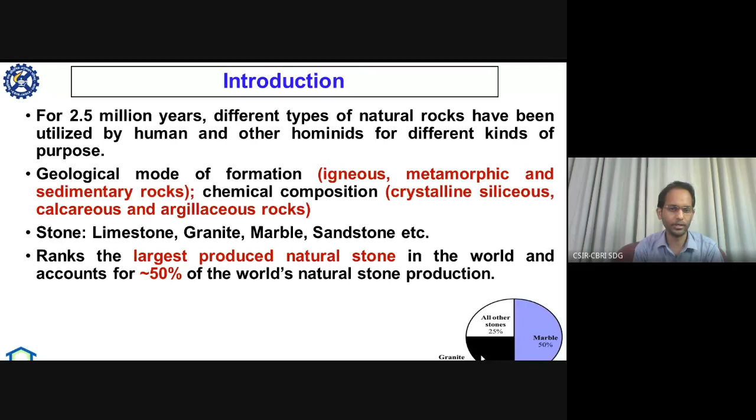On the basis of production, globally, India ranks as the largest producer of natural stone, accounting for nearly 50% of world's natural stone production.

Basically, as a brief introduction, limestone is a sedimentary rock which typically contains 70% by mass of calcium carbonate. Typically, in many forms of limestone, some amount of silica or magnesium carbonate is also there. If the incorporation of SiO2 is there, ranging from 30 to 40% or 45%, which will reduce the overall calcium carbonate content, that limestone is called low grade limestone.

The annual production of limestone in India is about 238 million tons, out of which 10 million tons is Kota stone. Basically, Kota stone is a kind of low grade limestone. I am emphasizing here about Kota stone because the research work I will discuss further will be about low grade limestone. This data is taken from Center for Development of Stone, CDOS, the report published in the year 2017.

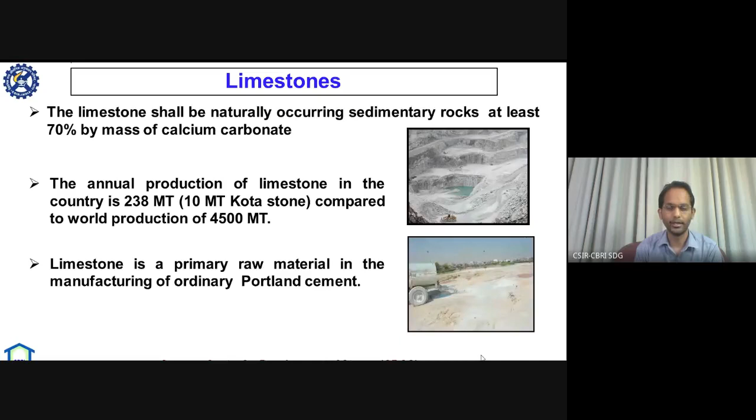Limestone, as we know, is primarily a raw material in the manufacturing of OPC. So it is widely extracted from quarries, mines, and therefore the generation of waste from limestone is higher than that of others.

Now here it is a kind of limestone, but it is low grade, as I have discussed in slide number 4. So the processing of limestone, either by chainsaw or diamond wire cutting or during polishing from quarries, generates a major amount of waste, that is 50% of the waste, which is annually about 4.5 million tons.

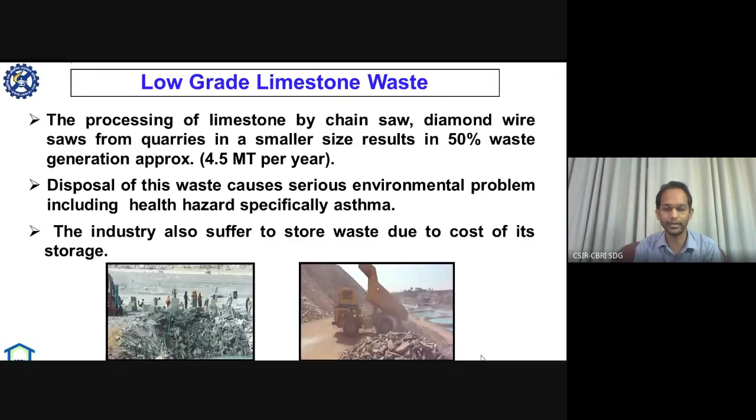Disposal of this waste causes various kinds of environmental pollution, like air pollution, water pollution, and land pollution. It also affects the longevity of people living near the areas where stone polishing slurries are dumped. The industry also suffers to store this kind of waste. You can see in both figures they just dump it in the open agricultural field, causing different kinds of environmental pollution.

In detail, the problems that occur are: the settled slurry is pumped out into adjacent agricultural lands, which devastates the fertility of that agricultural land by choking the overall porosity, and decreases the nutrition value of that agricultural land.

These microfine slurry particles, having D90 size of 200 microns and D50 size of 5 microns, choke the drains, as I have discussed, in the rainy season, create dust nuisance, and affect productivity of fertile land due to decreased porosity. Due to this long-term deposition, the finer particles block the flow regime, which affects the groundwater table, and thus overall underground water availability reduces.

As you can see here, these left two figures show the dumping sites of marble slurry in the Udaipur region, and in the right bottom you can see the RSPM level, that is respiratory suspended particulate matter, which we can inhale. I am not talking about the particles that we can't inhale, that is given in the rest of the two figures.

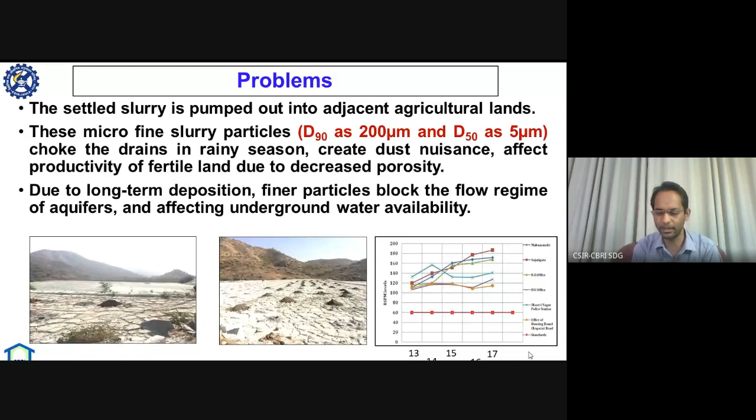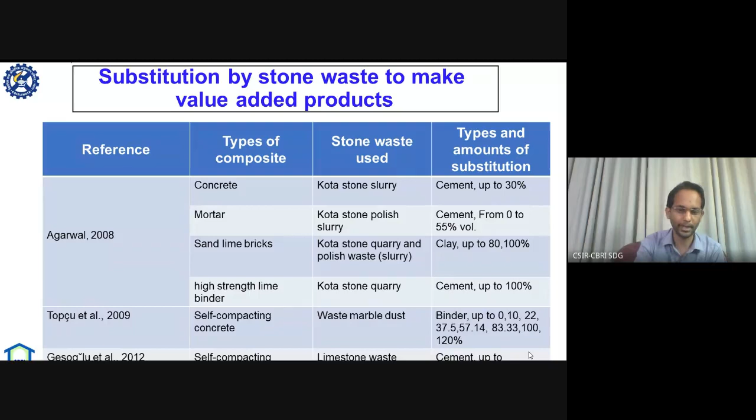Now I will discuss the work carried out by many researchers, such as Agarwal, Topçu, and Gesoğlu. These researchers have used Kota stone slurry, marble slurry, and limestone slurry, and substituted cement in fractions ranging from 0 to 100. Some replaced clay, some replaced cement, and they developed concrete, mortar, sand lime bricks. A binder was also developed, known as ALPM, activated lime pozzolana mix, developed at CBRI in the early 90s. Self-compacted concrete has also been developed, and so on and so forth.

Overall, if we replace the sand with stone slurry, any kind of stone slurry, whether marble, limestone, granite, or sandstone, it will increase the strength attributes, whether compressive or tensile. It will increase thermal resistance, abrasion resistance, shrinkage, and cracking resistance, etc.

But if we replace cement in a higher amount, more than say 20%, it will at the same time decrease the strength and thermal resistance. Heat of hydration will be decreased, and setting time will be reduced because it forms nucleation sites in the cement composite mix during hydration. Workability will also decrease due to its higher fineness.

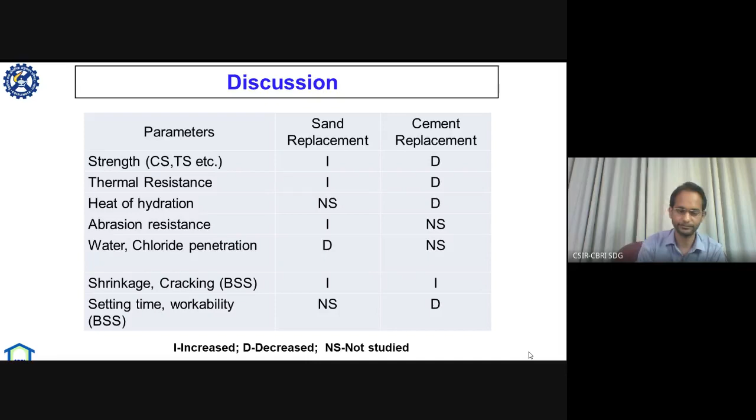So the need for research, why we developed lightweight concrete blocks from stone: India is the second largest producer of bricks in the world, with annual production of about 200 billion bricks, which uses 400 million tons of good quality soil every year. The number of brick producing units, whether vertical shaft kiln, high draft kiln, or any other kiln, is more than 1 lakh. The burning of fuel results in greenhouse gas emissions in the form of CO2, NOx, etc., and ashes generated from fuel cause various kinds of environmental pollution, including air pollution majorly.

So the replacement of stone powder waste as an aggregate, powder, or dust with cement or aggregate in conventional concrete has improved the properties of hardened concrete, as I have already discussed. Therefore, lightweight concrete as a replacement for brick is developed, as per IS 2185 Part 4, which is about lightweight concrete, which I will discuss further in brief. We have evaluated different attributes, physico-mechanical and chemical properties, in terms of workability, compressive strength, strength performance factor (the ratio of strength and density), fresh properties, drying shrinkage, and microstructural characterization, etc.

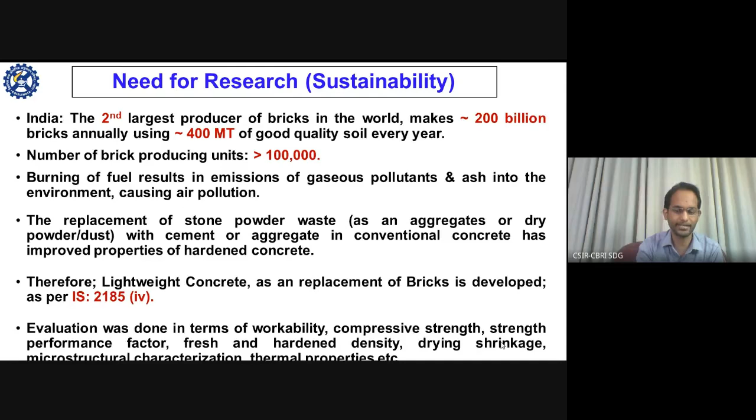For foam concrete, we use a foaming agent. The foaming agent can be organic or synthetic. Organic means natural protein, or soybean protein we can use. And the curing is just moist curing or ambient air curing. The industry mostly uses moist and air curing, not water curing. The reason I will discuss in the further slides.

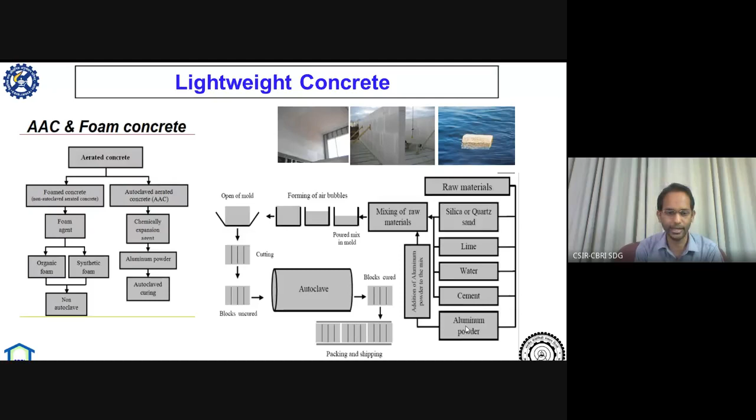So now my main emphasis in the further presentation will be cellular foamed concrete, CFC. I have used the mechanical aeration method, and the technique was preformed foam. That is, the foam was formed before the mixing process. It was not like after adding the whole material, after some time the formation of gas will be there. We developed the foam prior to mixing in the mixer.

And basically foamed concrete contains stable air or gas cells uniformly distributed in the mix. Note that it should be uniformly distributed, and it was as per IS 2185 Part 4, and it possesses high flowability, having flow value more than 150, low self weight, minimum use of fine aggregate, controlled low strength, and excellent thermal and sound insulation properties.

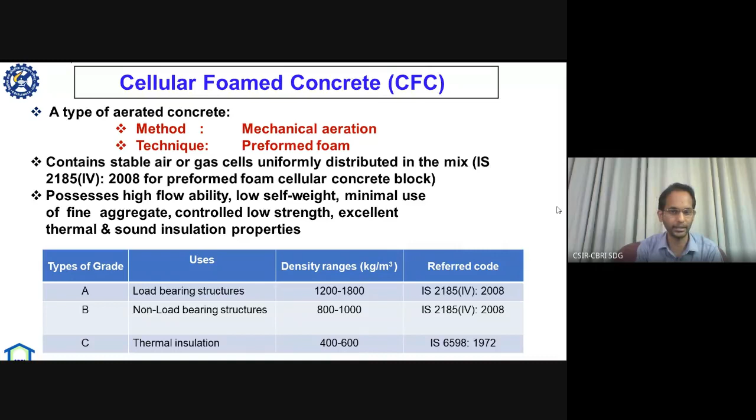On the basis of grade, there are three kinds of CFC, that is A, B, C. The A grade is used for load bearing purposes, having density range from 1200 to 1800, and the respective referred code is given in the right column. Grade B is for non-load bearing structures. In the further slides I will discuss the CFC of grade B, and grade C is for thermal insulation as infill material.

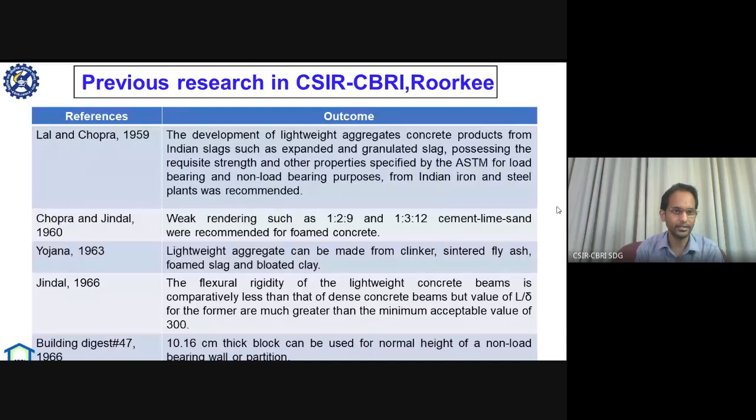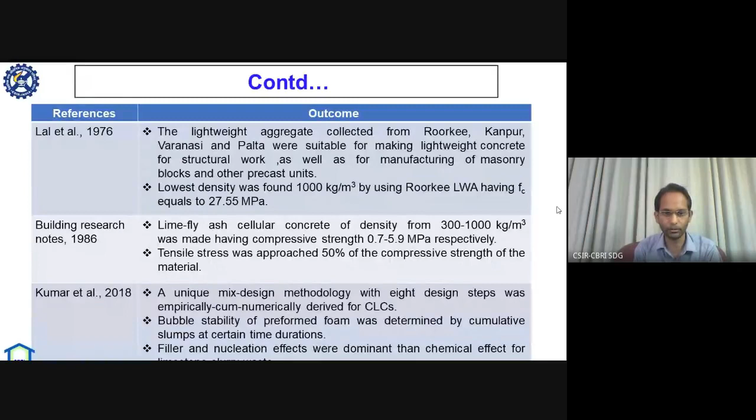So this is the previous research work done in CSIR CBRI starting from 1959 to 2018. These research papers are published and available online. And now in our group we are doing a comprehensive research study regarding foamed concrete, autoclaved aerated concrete, and lightweight structural concrete.

So in brief, I will tell you what experimental program we have followed. Firstly, we collected the waste. We identified the dumping site from where we should collect the slurry. It should not be so wet, because the wetness of the slurry affects the fresh properties, workability, flowability, etc. of the end product. Then material characterization as per IS 383, IS 2386 Parts 1 to 9, and IS 8112, etc. we have done.

And also we determined the particle size analysis from a laser particle size analyzer to see the packing density effect, how the added slurry powder affects the overall packing density. We did this prior to mix design. Then we developed a unique mix design methodology with 8 design steps. I will discuss it very briefly in the further slides. And that novel mix design has been published also.

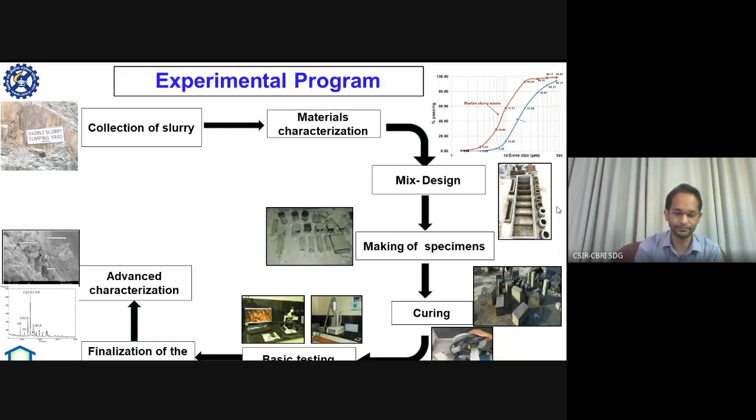So it took almost 6 to 7 months to design this mix design, because it uses different trials, also American standards, British standards, and then a final mix design methodology by deriving a few formulas. And then we found that the error in the compressive strength and the dry density was below 5%, which is desirable.

So we have concluded that this design is suitable if anyone wants to develop lightweight concrete from the waste material, which is very fine and doesn't fit in any zone like zone 1, 2, 3, 4, as you all are aware from IS 383, in which 4 kinds of zones are given. So this slurry doesn't fit in any zone. So with this mix design, we can develop lightweight concrete of suitable targeted density, whatever you desire as per your need.

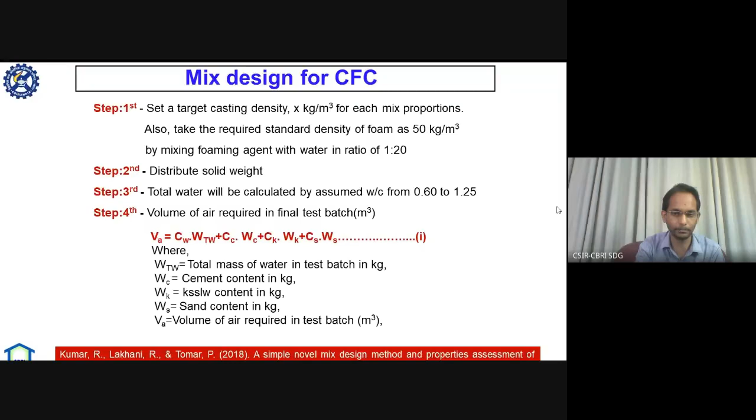Then after that, we calculated total water, which was calculated assuming water cement ratio ranging from 0.6 to 1.25. Then we have done the trials, and after the trials we have done the regression analysis, and from that regression analysis and some perturbation, we have seen the effect of various kinds of solid materials on the volume of air. So after the empirical analysis, we have developed this formula. The detail you can find in this paper, which was published in the year 2018.

Then we found the volume from volume of air, and then weight. And then we determined the amount of water in the mortar-based mix. What does mortar-based mix mean? Mortar-based mix is just the mortar mix without foam. So we have subtracted the weight of foam, because the overall water cement ratio should be constant. Otherwise, it will affect the workability of the CFC mix.

And if the CFC mix is not stable, then segregation of the green cellular foamed concrete mix will be there, as we know in the case of normal concrete. So at step 7, before casting, we made sure that casting, curing, and mixing times were standardized, although it is not mentioned here.

And then we checked for consistency and the achieved density ratio after 28 days. Suppose we have targeted 1000, and we are obtaining 990 kg per meter cube after 28 days. So it is okay that we have 990 by 1000, that our real final density is somewhat near the target. So like that, we have determined the consistency and achieved density ratio for each mix.

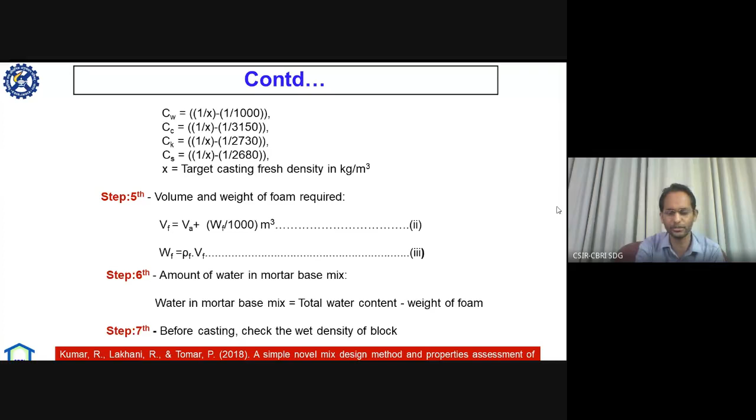So we have taken 2 series. We have casted the mix proportion in 2 series: series 1 and series 2, denoted as S1 and S2. S1 means the density 1000 kg per meter cube. Hereafter, I will nominate 1000 kg per meter cube density as S1, and S2 as 800 kg per meter cube.

In each series, whether it is S1 or S2, we have taken 5 phases, and the phases were with respect to the percentage replacement level of stone slurry with sand. The phases were nominated as P1, P2, P3, P4, and P5. In P1 there was no replacement, that is 0% replacement level. In P2 25, P3 50, and so on for 75 and 100. So 2 series S1, S2, and 5 phases P1 to P5.

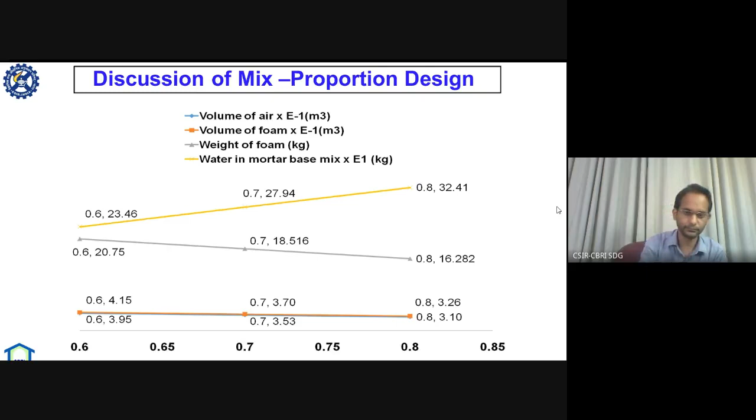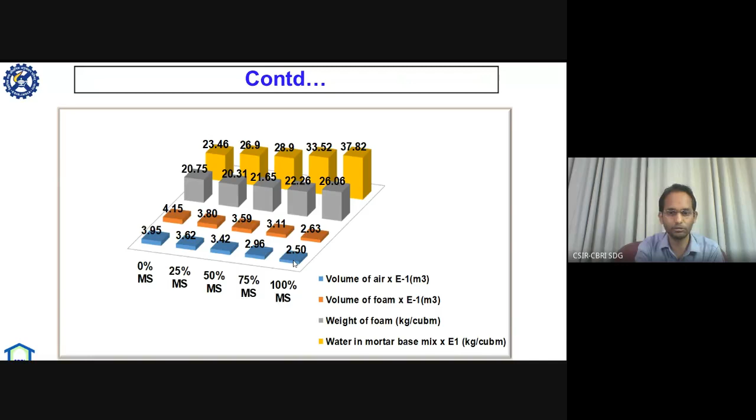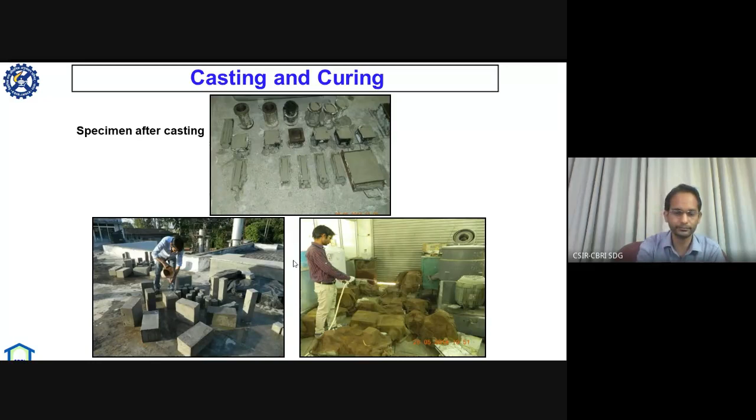Then we have done casting and curing, specifically air curing and moist curing. Then we have conducted various kinds of physico-mechanical and chemical tests. We have determined the compressive strength, tensile strength, and flexural strength. Not only strength, we have determined the strength performance factor, which I will discuss in the upcoming slides.

And we have determined the coefficient of thermal expansion. We have a facility in our lab called a dilatometer, which can give you the CTE, that is alpha, which is a major property that should be measured if anybody is studying fire performance or doing fire modeling. So we have done that also at different temperatures.

We have also done the thermal conductivity through the transient state method, known as the C-therm analyzer. We have determined the thermal diffusivity and specific heat capacity. We have compared these values with the brick also, and to see the influence of stone slurry on the hydration of the cementitious system, we have seen the XRD and SEM also.

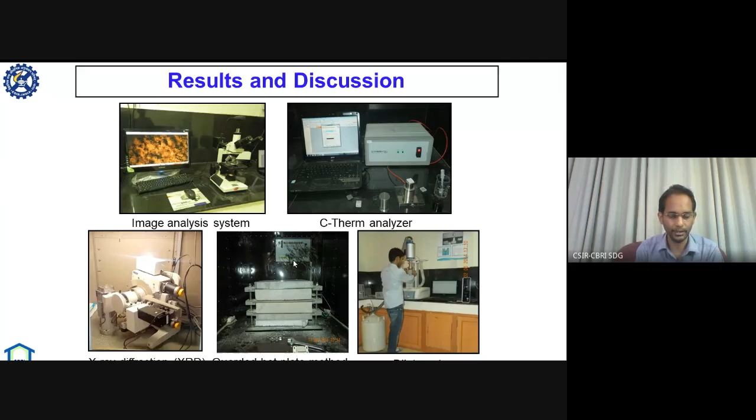So here, I will tell you something about performance factor. Firstly, why we have determined the performance factor, not strength and density specifically. When you read research papers regarding conventional concrete having density of 2400 kg per meter cube, you can see that strength and density values are written separately. In practice they do not write strength and density as a ratio, because it is well known that normally the density of conventional concrete ranges from approximately 2300 to 2400 kg per meter cube.

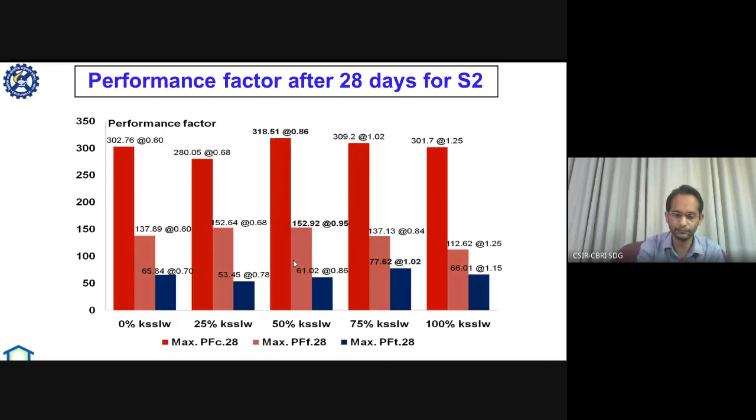We have also seen the average area of voids to compare our theoretical entrained air voids, not entrapped air. So our main intention was to incorporate entrained air, whose size ranges from 10 micron to 1 mm, and which are not quite harmful for concrete from a durability perspective.

But if you see the effect of entrapped air, they are quite bigger than entrained air. As you normally do the casting for normal concrete, you can see that many times there is formation of entrapped air, and the size ranges from 1 mm to 4 mm, 5 mm, and they are quite harmful. Therefore we limit the quantity of entrapped air up to 4 to 5%.

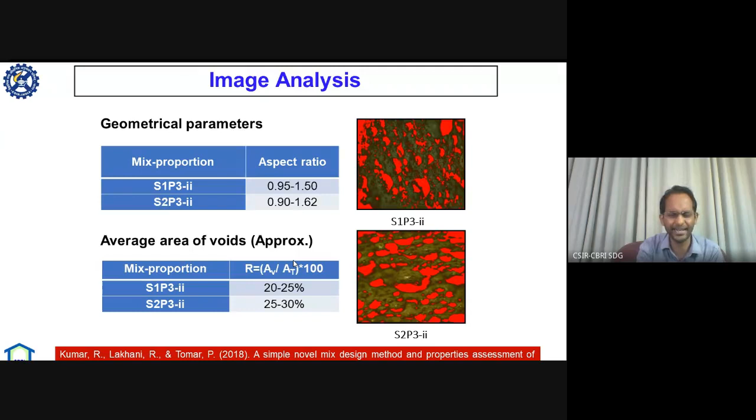Normally, in conventional concrete having density 2400 kg per meter cube, I am just comparing here the properties of conventional concrete to make you understand the difference between lightweight concrete and the conventional normal concrete, which is typically used at many sites.

So normally brick has thermal conductivity ranging from 0.65 to 0.80, and the thermal conductivity of concrete ranges from 2 to 2.5 or 2.75. It depends on the amount of aggregate added, and the rock type, whether it is sandstone or marble stone or granite. In limestone the pores are quite less than in sandstone. So if the pores are more, the thermal conductivity will be less for aggregate, which affects the overall thermal conductivity of concrete, because in concrete approximately 60 to 65% is coarse aggregate, typically. So it indirectly imparts the overall thermal conductivity of concrete.

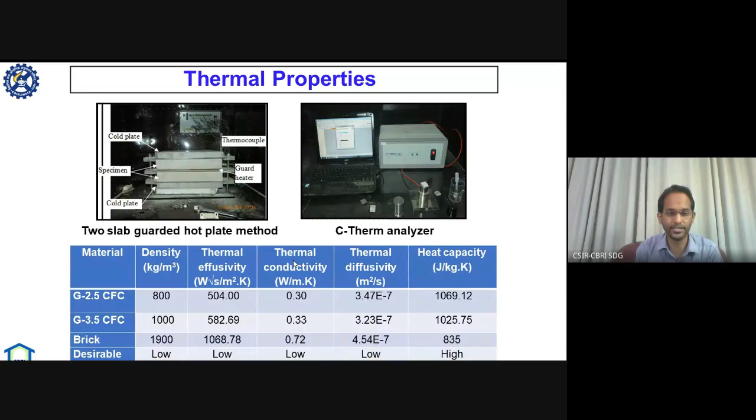Like for C&D waste concrete, as our colleague Dr. Santa Kumar mentioned, it has adhered mortar, so it can impart lower thermal conductivity to that concrete mass as compared to conventional concrete. So our main aim should be a lower thermal conductivity, and you can see here that for brick it is 0.72, and for lightweight concrete it was just half. So it fulfilled our overall aim.

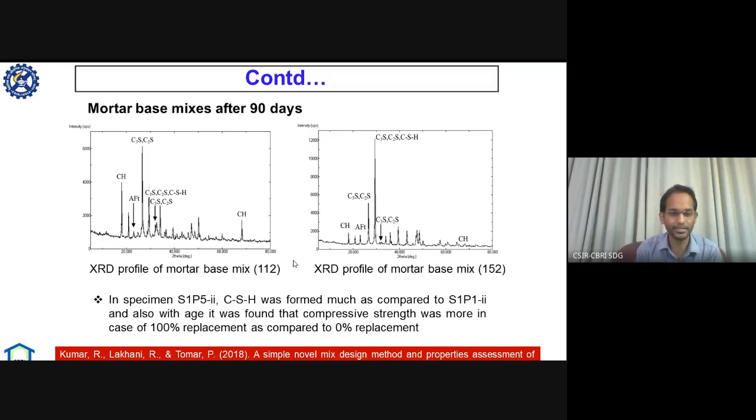And if we see the macrostructural properties, we have seen that when we replaced the fine aggregate with 100% stone slurry, the intensity was more as compared to control conventional concrete, that is no stone slurry. And CSH is the major phase which is generated in the cementitious system and imparts the 7 days and 28 days strength properties. So we have seen that CSH was formed more in case of 100% replacement, and that's why compressive strength for 100% replacement was more as compared to 0% replacement.

Therefore, the strength was very high, and AFT phase was more in case of 100% replacement level of stone slurry. Generally, what happens is when C3A, which is the alumina phase of the cementitious system, reacts with gypsum, it forms ettringite, which is denoted as AFT. And if the gypsum is depleted, if enough gypsum is not there, then that C3A converts into AFM phase. But when we add calcium carbonate, the calcium carbonate reacts with AFM and generates AFT again.

The formation of ettringite will take place again, and apart from AFT, there will be formation of two other kinds of phases, that is AFMC, that is monocarboaluminate, and hemicarboaluminate. Although the solubility product of calcium carbonate is quite low, like if you add 100 gram of calcium carbonate, only 20% will dissolve and take part in the reaction. So the formation of hemicarbonate and the AFMC phase will be there, which stabilizes the AFT phase, as you can see in the right part.

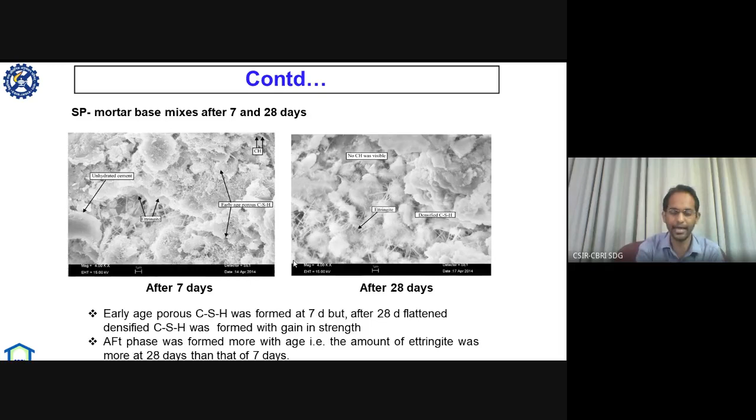So overall, the conclusion was we started by taking the water cement ratio of 0.60 for the control mix. We have taken the water cement ratio less than 0.60 and achieved overall good strength, but the workability and flowability was quite less. So we have not chosen the water cement ratio less than 0.60. In normal concrete, we typically take a water cement ratio of about 0.40, and the maximum strength performance factor, that is compressive strength, was 382 and 318 at water cement ratio of 0.86, and it was achieved with 50% replacement of sand having fineness modulus of 1.07.

Now regarding this fineness modulus, normally if you see the table given in IS 383, there are 4 kinds of zones. But we have taken the river sand, that is Solani river sand, which has fineness of 1.07, because as per the British Cement Association, the sand we add to develop lightweight concrete should have fineness less than 1.25. Therefore, we have chosen very fine river sand, and the stone slurry has fineness 335 meters square per kg, which is quite more than that of cement. As you know, cement typically has fineness about 260 to 270, with minimum 225 meters square per kg as per IS 8112 code.

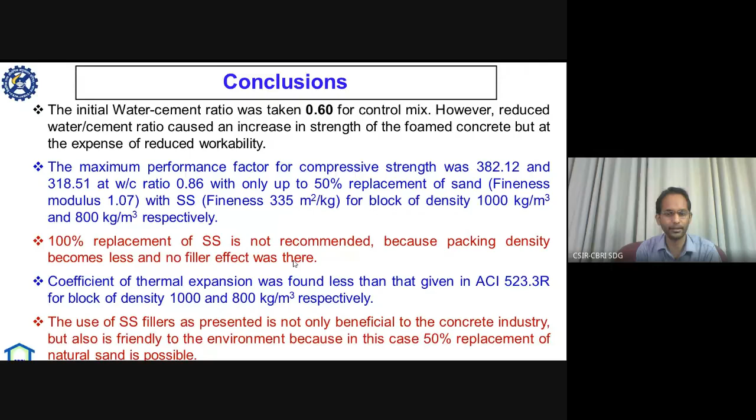And generally, it is not recommended to do 100% replacement with stone slurry powder, because the packing density will be quite less, and the filler effect will not be there, because void ratio will be increased, and as you know packing density is related with void ratio. More void ratio, less packing density. And the coefficient of thermal expansion was found as per ACI 523.3R, for both series, that is S1 and S2. And thus the use of stone slurry filler as presented is not only beneficial to the concrete industry but also friendly to the environment, because in this case we can replace 50% of natural sand.

Now I will tell you briefly what properties we have achieved, as compared to brick, and what should be there as per IS 2185 part 4. The dry density was in the range of 825 to 1050. Our target range was 800 to 1000 kg per meter cube, so the error was very small. Our mix design was such that we achieved nearly the exact target density we wanted. And as you are aware, normally class 1, class 2, class 3 types of bricks have density of 1900 to 2000 kg per meter cube.

The compressive strength of the developed block ranged from 3.75 to 5.75, which was at par with the compressive strength given in the IS code. And compared with brick, the thermal conductivity was quite less, and as per the standard given in IS code. Water absorption compared to brick was nearly the same. And the cost, this is the main issue for industrialists and entrepreneurs. So you can see that cost was just half.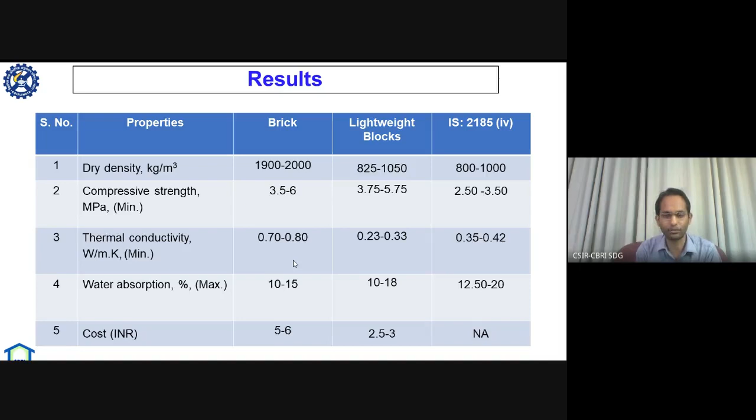As I have already discussed in detail, the advantage here is that the raw material was cement waste and sand in case of the CFC block we developed, and it was quite eco-friendly. Energy consumption was quite less. We can handle these blocks with ease, and the finishing and uniformity was quite high, because it depends on us. Whatever shape we desire, we can give to the CFC because it has higher flowability.

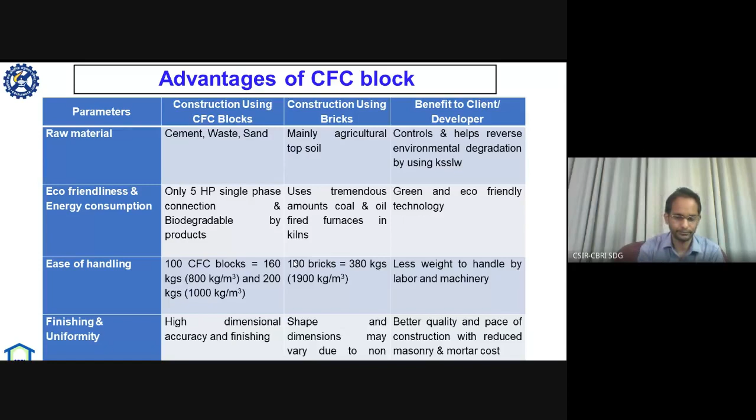Electricity consumption was low, just to run the foam generator and mixer, while it was quite high in case of brick production. The workability during and after production was very good, because we can drill these blocks, we can nail them, and this block can easily be sawn.

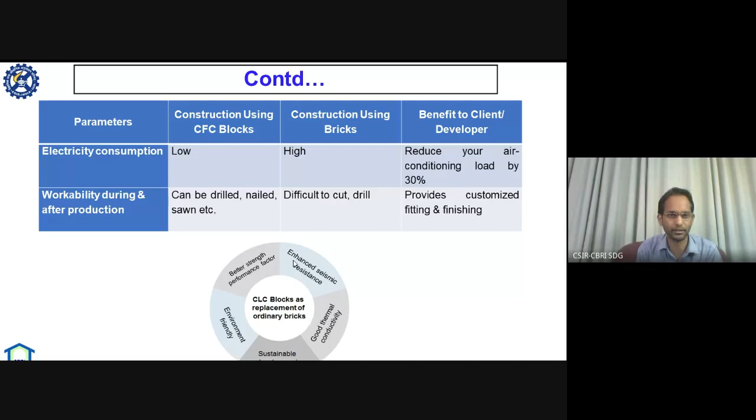But you can't cut a brick. If you want to make two halves of a brick, you have to break it with a cutter or something else. But these lightweight blocks you can just cut with a normal saw.

Apart from lightweight concrete products, I have not covered the other kinds of building products. Our team has developed different kinds of building products, such as flooring tiles as per IS 1237, paver blocks as per IS 15658, and of course lightweight blocks, which you can see in the last row, top right figure. We have developed these also.

These building products are dimensionally stable, cost effective, and durable. Application-wise, floor tiles can be used for light traffic loads and heavy traffic loads. Paver blocks we have developed with strength ranging from M30 to M50, so you can use those paver blocks for non-traffic and for heavy traffic also, depending on the standards given in the table in IS 15658.

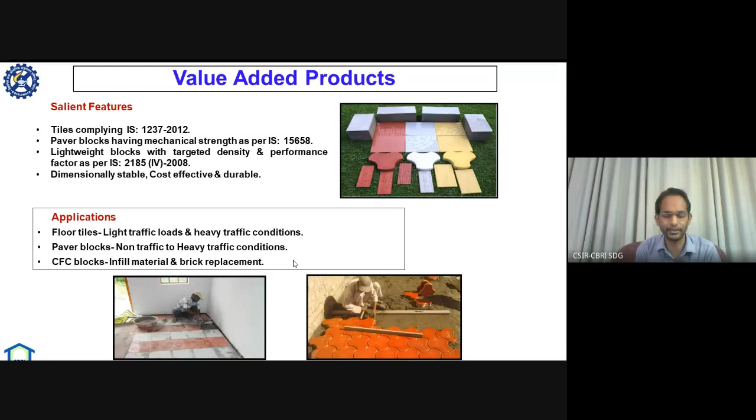CFC blocks can be used as material for infill and brick replacement. All these developed products have been implemented in our demo houses, and for pavement purposes you can see we have implemented these developed products for demonstration purposes.

Important parameters: the size of tiles was 1 foot by 1 foot, and the size of the CFC block was 400 by 200 by 200 mm, and you can cut it also as per requirement easily. The flexural strength of tiles ranged from 4.50 to 6.50. Normally it should be more than 3 MPa, which is as per IS 1237.

The compressive strength of the CFC block ranged from 4 to 7 MPa, and paver blocks, as I already told, range from M30 to M50 with varying thickness of 50 to 100 mm. After doing cost economics analysis, we found that profitability as compared to commercial tiles, paver blocks, and CFC blocks was approximately 35 to 45% on annual turnover.

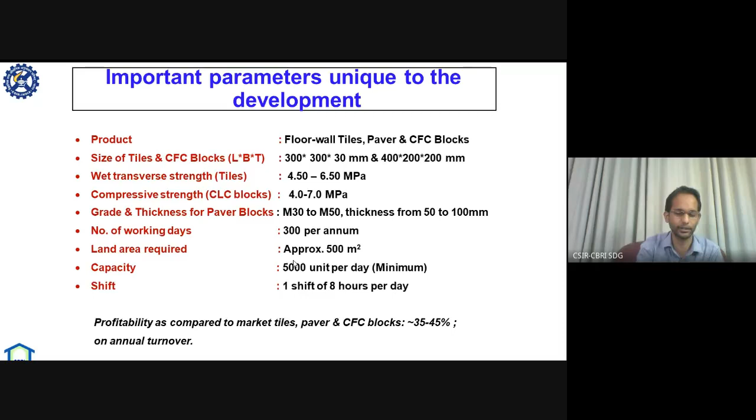Here you can briefly see what we have done regarding the selling cost. CBRI's tiles, flooring tiles, wall tiles, paver blocks, CFC blocks etc. - the cost is given per unit as well as per square meter, and the same is given for the same dimension for commercial tiles. You can see that for the CFC block, the overall cost was reduced by up to 40 to 50%.

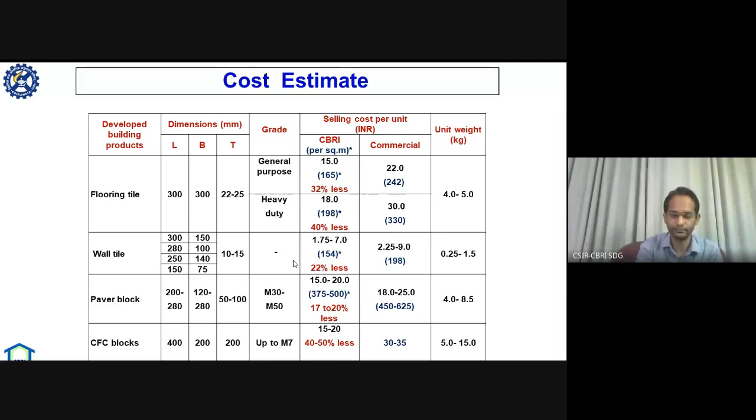After conducting this comprehensive, detailed research study in our group, we conducted industrial meets in the past in various regions of Rajasthan, in Ramganj Mandi, Kota, and in CBRI itself, also in Jaipur, where we demonstrated and presented our building products developed from stone waste.

After the demonstration, they admired our technology. Finally, in the year 2017, that technology entitled 'Building Products Using Kota Stone Waste' was transferred to RSPCB Jaipur. After the technology transfer, an MOU was signed for future collaboration, and we have also demonstrated the technology at our lab in CBRI.

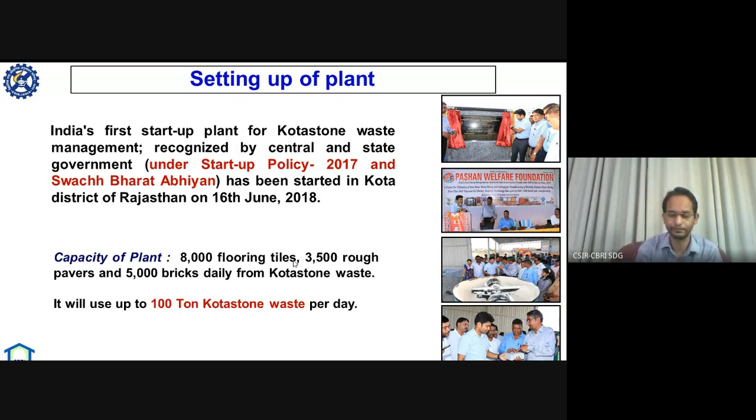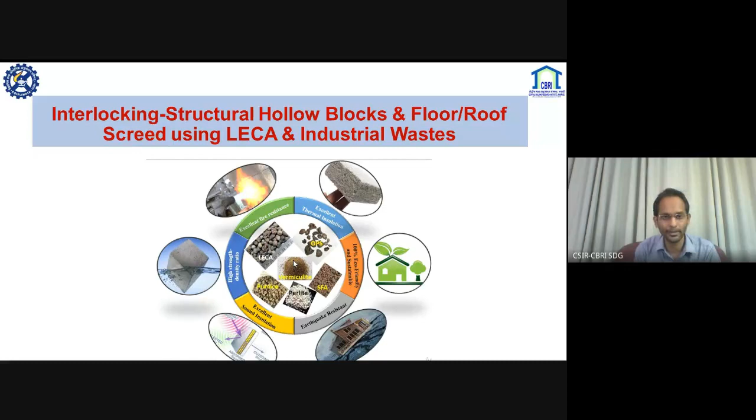Now briefly, in 3-4 slides, I will tell you about the ongoing work we are doing, for academic persons, industrialists, and whoever wants to collaborate with our group. Right now we are not only focusing on cellular foam concrete from stone waste, but also developing autoclave aerated concrete from waste. We are also developing structural lightweight concrete having strength more than 20 to 50 MPa, which can be used as floor screed for structural purposes also.

So we are using LECA, lightweight expanded clay aggregate, not normal aggregate. They are hard and have a honeycomb structure because they are formed after sintering of clay. LECA is 100% inert, vitrified, and dimensionally stable. They are frost and fire resistant, and have properties of thermal insulation and sound absorbent behavior. They have pores ranging from 25 to 50 percent, so they are quite porous.

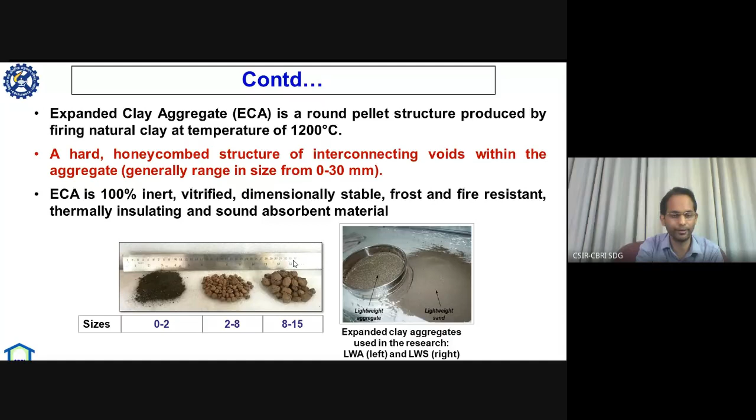The size we are using ranges from 0 to 15 mm, and we are replacing not only fine sand but also coarse aggregate to develop lightweight structural concrete. These are the raw materials we are using, and physical properties are given here for lightweight concrete. You can see the density of conventional aggregate has bulk density much more than the lightweight aggregate. If you take the size range from 2 to 8 mm, the bulk density is only 430 kg per meter cube, which is quite less.

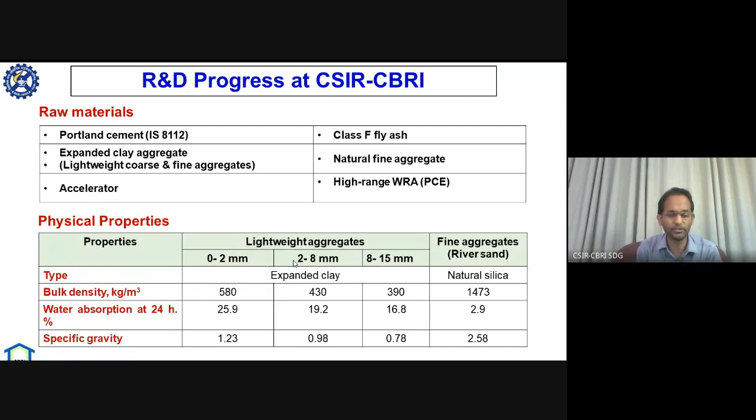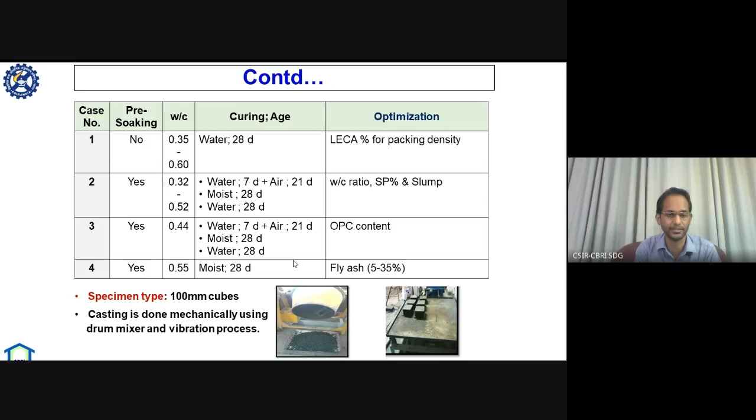To develop structural lightweight concrete, we conducted several trials to optimize the percentage of LECA to be added for packing density, to increase packing density, decrease the void ratio, and optimize the water cement ratio after adding super plasticizer for desirable slump value. We optimized for OPC, and our aim was also to reduce OPC content by incorporating fly ash up to 5 to 35%. For that we did casting, testing, and our main purpose was to optimize for U value.

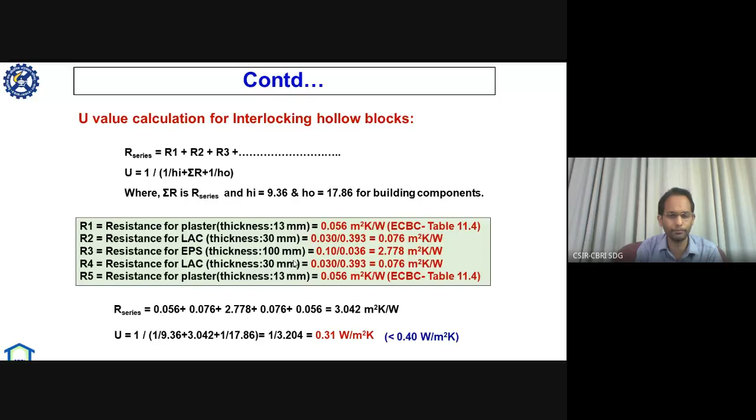If you see the ECBC code, Energy Conservation Building Code, revised version published in 2017, for composite climate like Roorkee area which comes in composite climate, our main target was to achieve a U value of 0.40. Till now we have achieved a U value of 0.31 watt per meter square Kelvin, and we are targeting to reduce it further.

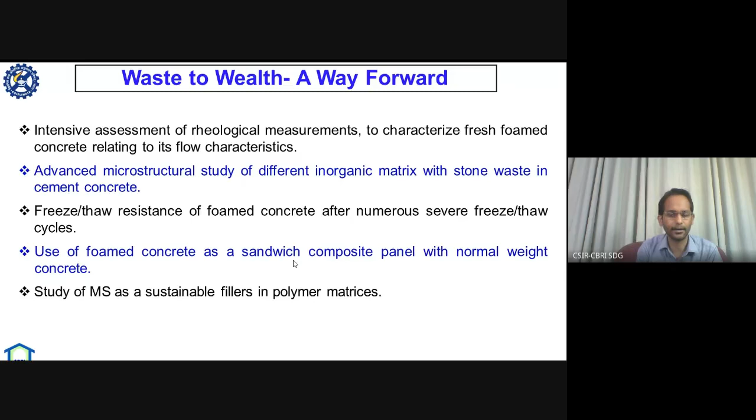I want to acknowledge my group leader, Dr. Mrs. Rajni Lakhani, who is head of the Organic Building Materials Group, along with Mr. Sanawaj Khan and Neha Rawat, who supported this research study in carrying out casting and physico-mechanical study, and also other project staff.